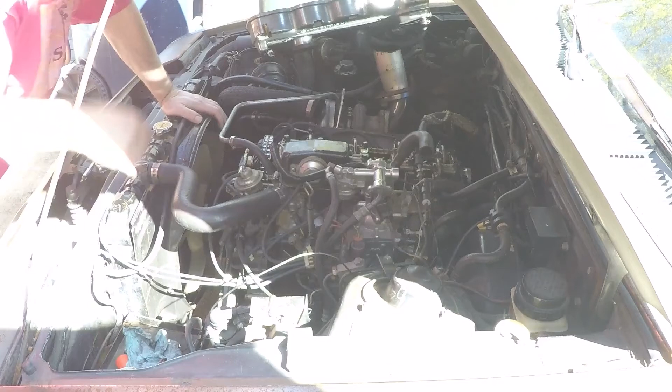Oh, wow. I've never seen that before. So, I think I found the problem.

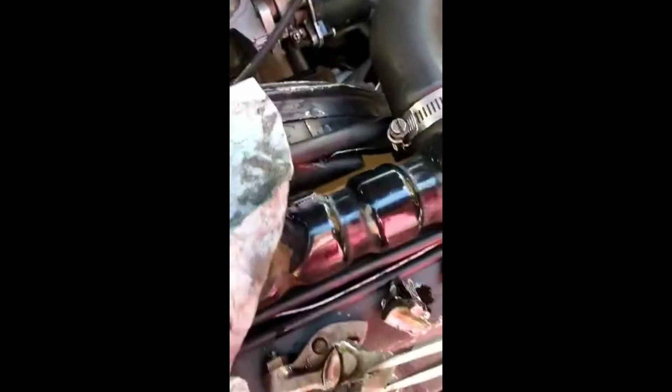When you turn your car on, does it return the favor?

What are we doing today? Today we're gonna look at the cam timing today, and the adventures of Starion.

We've got an engine that's just running poorly. Actually, it's been doing this for quite a while. I've been working on it, I've been ignoring it, and it turns out ignoring it did not fix it. So I've done a bunch of things, checked a whole bunch of stuff, but basically it's running really poorly and it smokes. Those two may not be related, but I kind of think they are. My thoughts are, well, it might be the valve stems are crappy and leaky. I don't think that would make the engine run so poorly though, but it would make smoke.

However, running poorly could be timing, so I'm going to go ahead and look at that. I'm going to pull the valve cover off to do that, and to do that I'm going to pull the PCV pipe off. And to do that, I've got to take this connector here to the air temperature sensor off my 1986 Mitsubishi Starion.

Can you see the problem? I can. Now I've got another problem - where are all those pieces?

Oh man, well, let's see what I can dig out. There's one chunk there, there's another big chunk there. Oh, hey, there's a chunk there. That's a pretty big chunk. What is that? Another big chunk there. Boy. Well, okay, something new, that's... you know.

And the good news is now we know what to fix. It's not a big deal - in fact, I can fix it without pulling the cylinder head off. But let's take a look at those parts. I mean, part - it's one part. It's many pieces now, but that's just one part.

And I can definitely tell that that's not right. Oh boy, there's a whole lot missing here. There's a whole lot missing here. Can I? Okay, yeah. Right. And it's still going.

Let's look for my... oh, you know, this, yeah. Problem there, yep, that's a problem. You see down there? You can't see down there. Oh, you can - yes, you can.

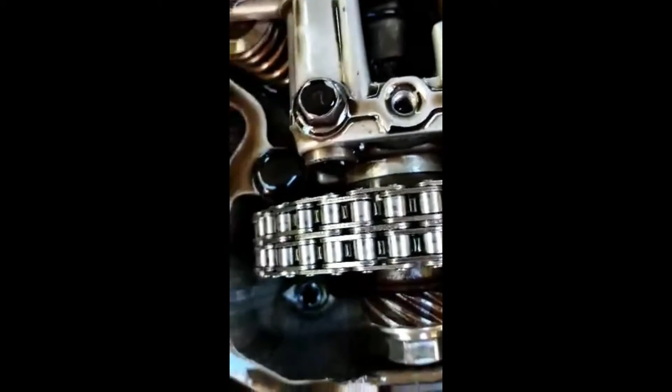Sorry about the horrible camera work.

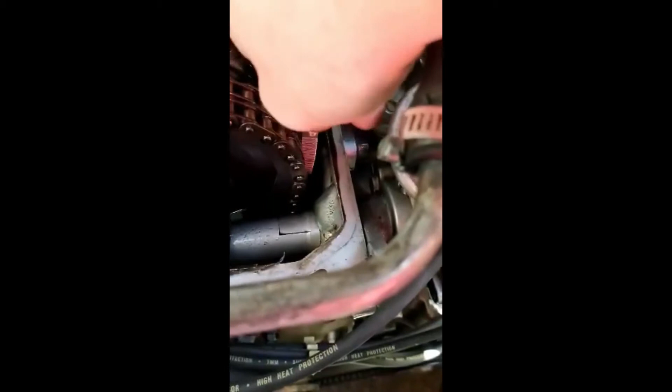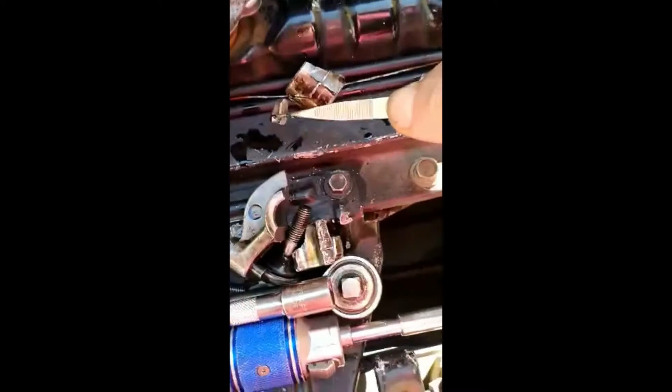Well, you got a problem there. Yep, that's a problem.

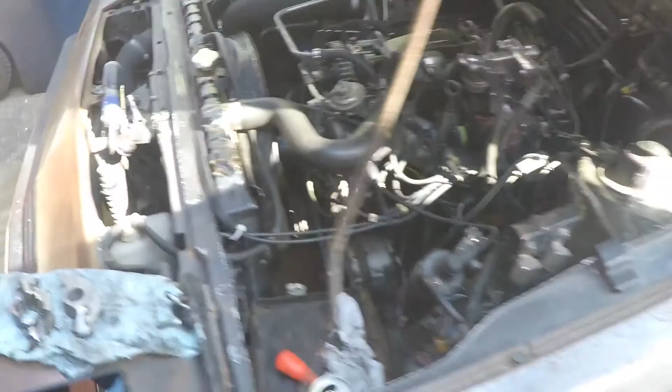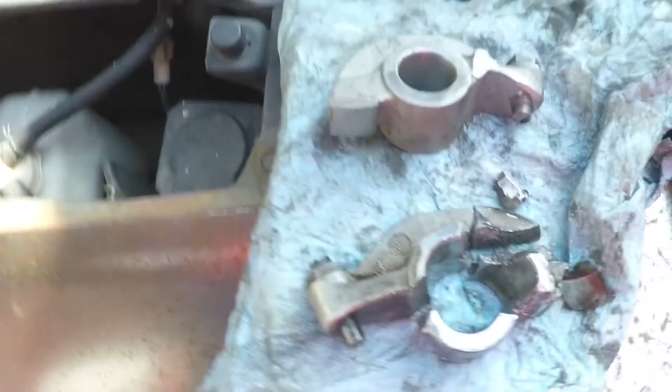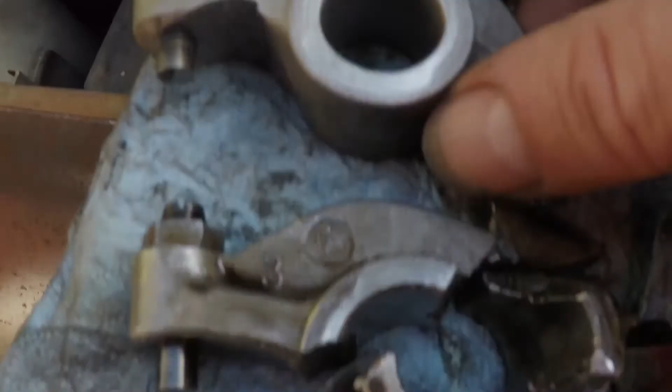So, got a plan. The plan - is this running? Yeah, it's running. So the plan is to pull up the valve train and replace this with this. I will need to pull this one. This motor has the long valve lashes, so I got to pull that off and put that on, and hopefully be good to go. So that's what to do next.

And I better plug in the power. And charging. Alright, so here we go. Here we go. Let's see, 12mm bolts.

I think what I'll try to do is tilt it. I'll see if I can get this off and slide the new one on, because if I don't, this timing chain is going to try to pull this cam up, and that's not really what I'd prefer it to do, if possible. I mean, I could pull the cam, pull all that. But if I can pull this tower off and slide it off, put on a new rocker, that would be the easiest way.

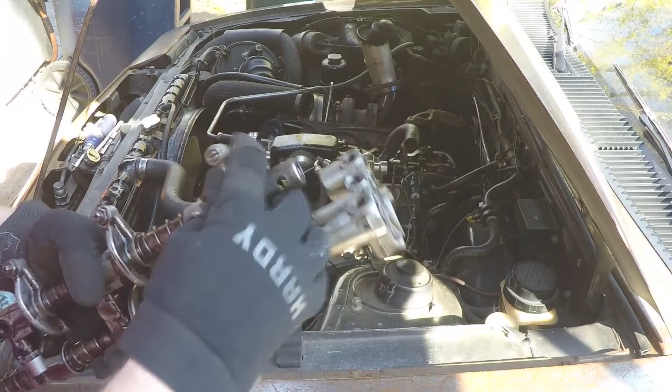Alright, we adjusted that so that we got just this one side off. Let's throw this bad boy on, and put this guy back.

Almost forgot the washer. Okay, the springy washer. That got back in there.

So if you look carefully, we can see they're not exactly the same.

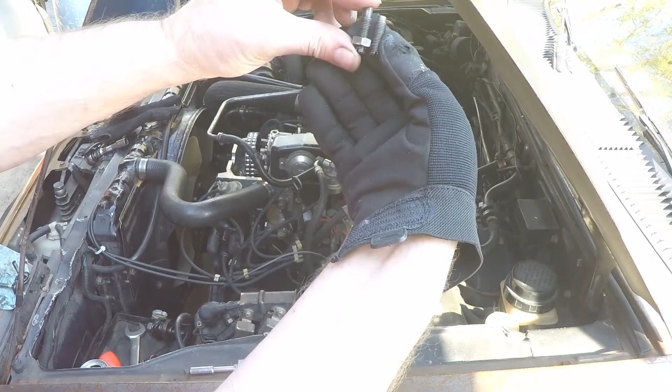Just to show you the difference, this one on the left here is the long one, and the one on the right is the shorter one. This style I believe is on 83 heads.

Okay, so this car is an 86, but it has mechanical lifters, which means they have to actually be set. On most of the 86s, they have hydraulic lifters. This car has been modified a little bit, and that's one of the modifications, putting mechanical lifters on here.

I like mechanical lifters better than hydraulic lifters. However, the important thing to know is that you have to adjust the mechanical lifters, and that was where we had the problem. We actually have a broken rocker.

What we need to do is set the valve lash. On the 1986 or 1983 manual, you'll find that it says set the intake at 0.15 millimeter, which is also

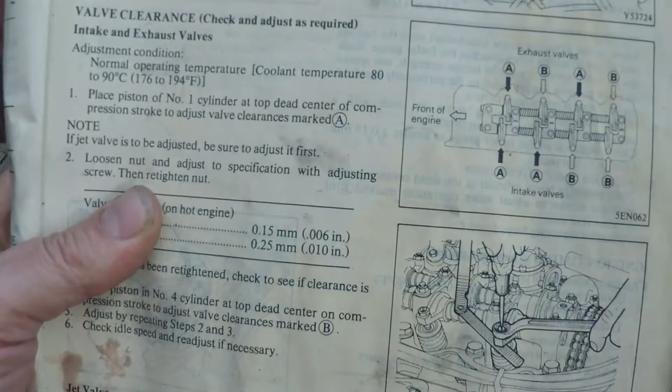Alright, so here, hopefully you can read this in the manual. Here is the order. This side is the front, this is the back. So this is 1, 2, 3, 4 that you set the valve lash.

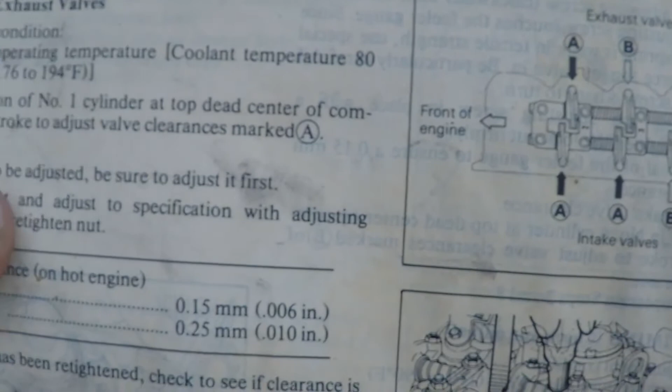And the valve lash for number 1 is A and A, and you set that at number 1 top dead center. And there are your valve lash settings.

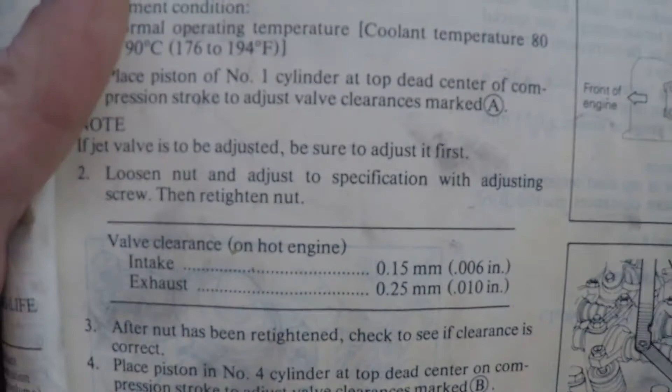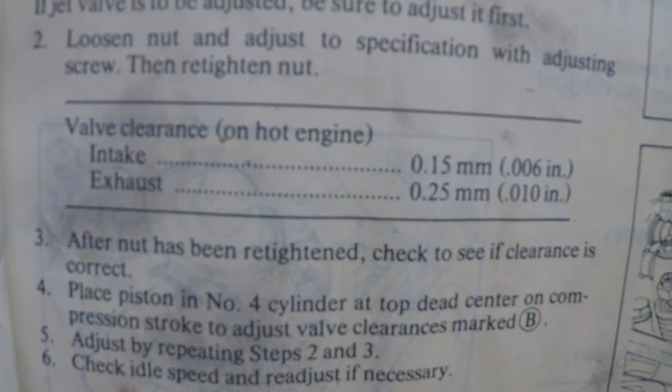Okay, so after you do A, then you rotate the engine 180 degrees, or I guess it's 360 degrees, so that number 4 is at compression stroke, and then you can do all the B's.

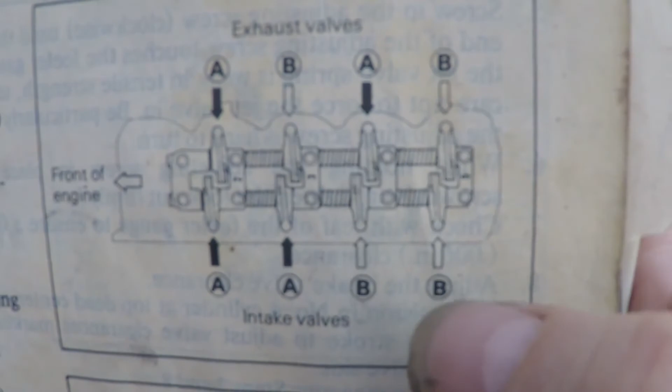So exhaust side, intake side, front, back. Alright, so here we go.

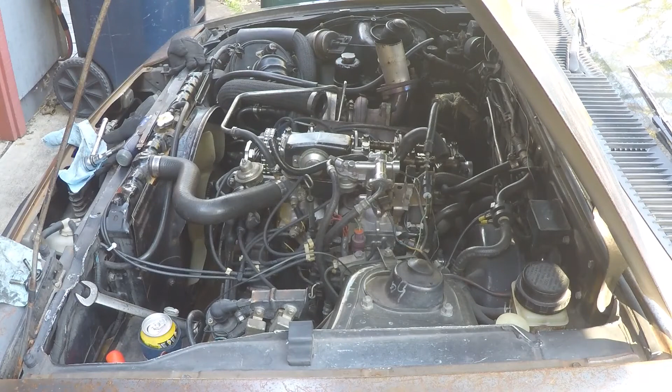I've got the two sizes I need, 0.010 and 0.006, or 0.150. And we're working on the exhaust side, so we're going to go with 0.010.

Oh, also, if you have jet valves - this is a non-jet valve head. If you had jet valves... and these are also hot settings. The engine's supposed to be hot, the engine's not very hot, so this will be close enough for now, and then we can get the engine hot and check them again.

And let's see if I can look at that order. So, we just got to remember this.

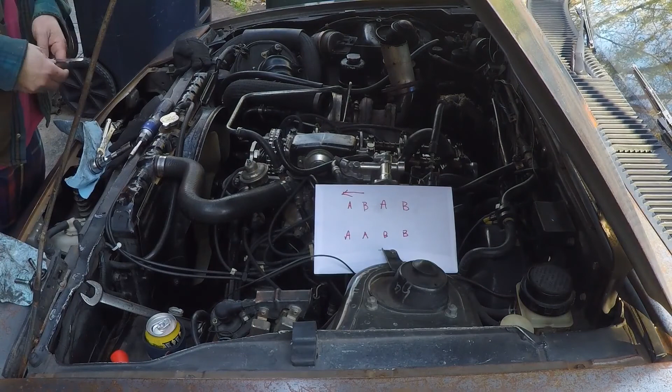So far, the only tool I've used is 12 millimeter. 12 millimeter nut here, 12 millimeter nuts here, 12 millimeter nut here, and 12 millimeter nuts hold the valve cover on. So really, you just need a screwdriver and a 12 millimeter wrench to do all this, and that's all you need.

Pretty cool. And some pliers to squeeze that. And also the throttle cable here is a 12 millimeter.

So it looks like it's set close enough. Might be a little tight on a couple, might be a little loose on a couple. Doesn't matter for now if they're close enough, and after I warm up the engine, then we'll look at it again.

So, put her back together now.

And you don't need many tools. You need a 12mm, you need a gauge to measure, and a screwdriver. And we're set. So that wasn't so bad, was it?